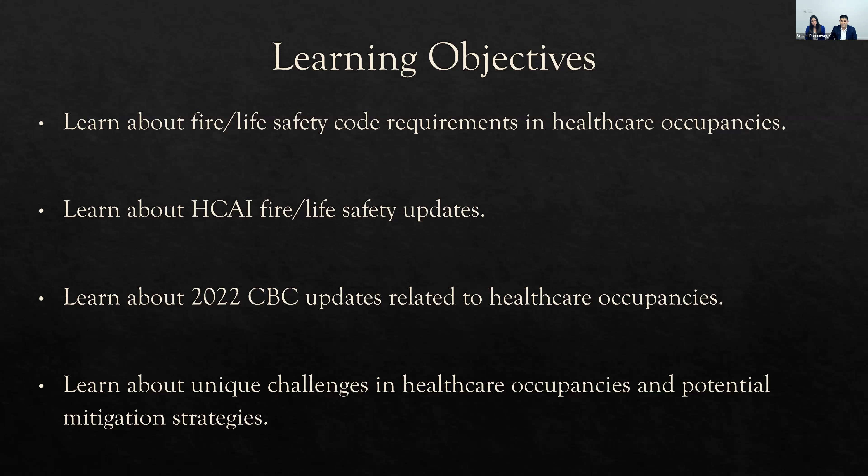Here's our learning objectives, which I think was covered in the advertisement. For the agenda, we'll give a brief overview of the fire life safety concept. Nancy's going to take us through some HCAI updates, and then we'll go over CBC updates related to healthcare facilities. If we have time, we'll cover some key fire life safety issues we commonly see coming up.

So, good to think about from a fire protection life safety perspective: why are hospitals different? The main reason is we have many occupants who are incapable of self-preservation. They might be on life support, they may be undergoing procedures - they effectively cannot evacuate themselves in an emergency condition. So it's a unique safety hazard that the fire protection life safety requirements need to address. If there's a fire event, we can't just have everyone go to the stairs. We need to incorporate features into our buildings that can protect those vulnerable occupants.

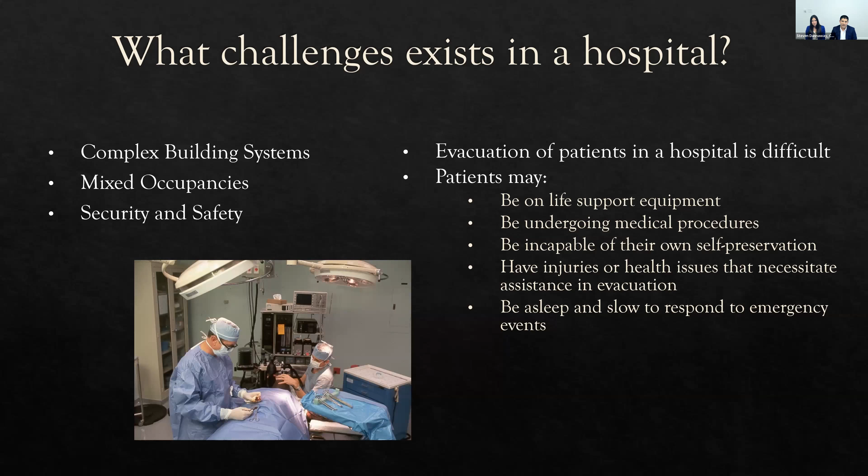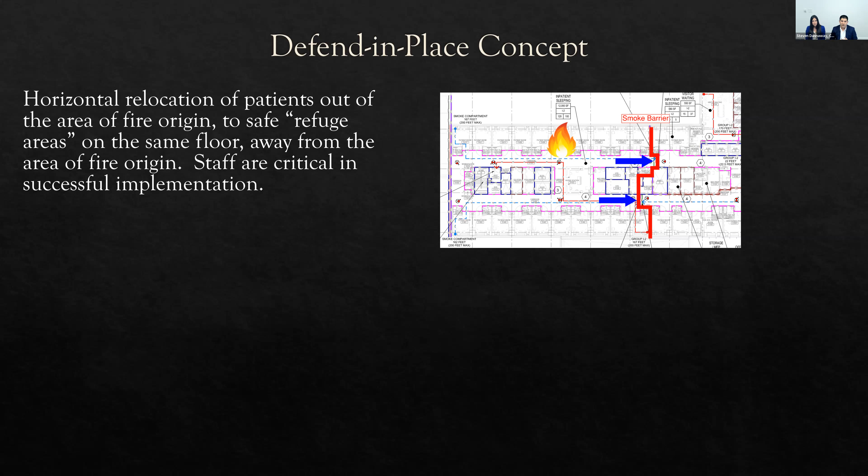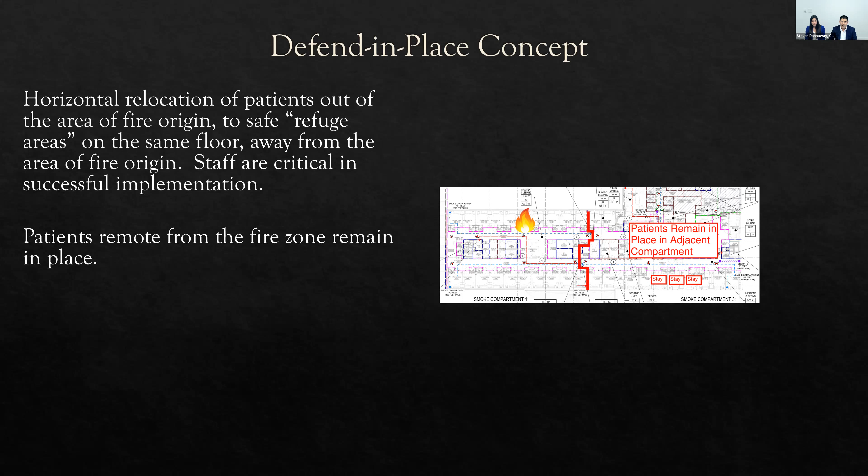I want to cover the defend-in-place concept, which is how we do that. Say there's a fire in one smoke compartment - one area of the patient floor. Staff will be responsible for assisting with the relocation of occupants across smoke barriers into an adjacent compartment. Meanwhile, patients on the other side of the smoke compartment will stay there in defend-in-place mode, which is where that terminology comes from. They won't be evacuating, they'll be finding refuge, waiting as events unfold, and as staff and emergency responders decide the next course of action. Other occupants in the building can still use the stairs, and the stairs are a last resort if evacuation necessitates it, as well as a very important feature for the fire service to access the floors. So that's definitely why we still need stairs in our code - we have to incorporate them into our designs.

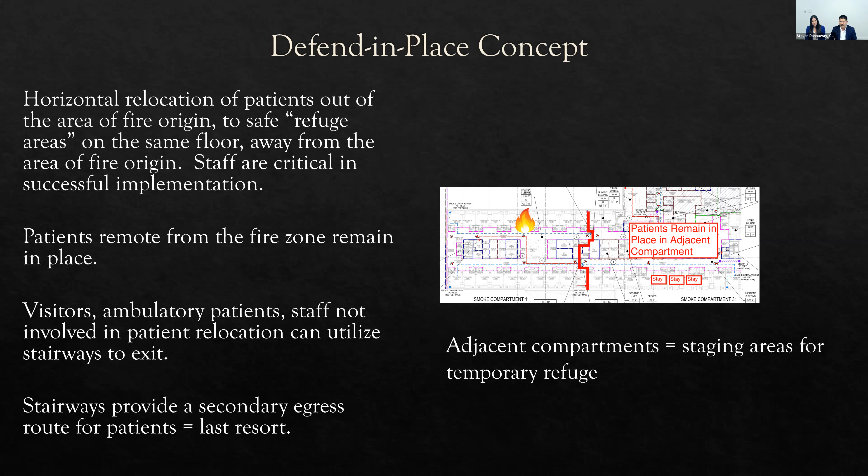Okay, so I'll turn it over to Nancy, and she'll take us through the HCAI updates.

Just a brief update, thank you Steve. Some of this is old news now, but still big changes - all upper management is new.

Paul Coleman retired, and Gordon retired—some of you might be familiar with him from working in the LA office, where he was the deputy division chief. Our director is new as well; I didn't put her name on here, but it's Elizabeth Landsberg.

So literally everyone above supervisors and up are new to their positions, not necessarily new to FDD. Chris Tokas is the new deputy director—I say the new Paul, but people know Paul's name. Arash is the new deputy division chief in LA, and Richard Tannehill is the new deputy division chief in Sacramento.

Project-wise, the numbers are about 19 billion in construction projects right now, give or take. We actually had about 80% of our staff teleworking, but we've since brought them back. Tuesday, Wednesday, Thursday we're back in the office, and then most people work from home Monday and Friday.

We have about 33 vacancies at FDD, so if you're looking, keep us in mind. I'm sure everyone's in the same boat—it's hard to find people right now.

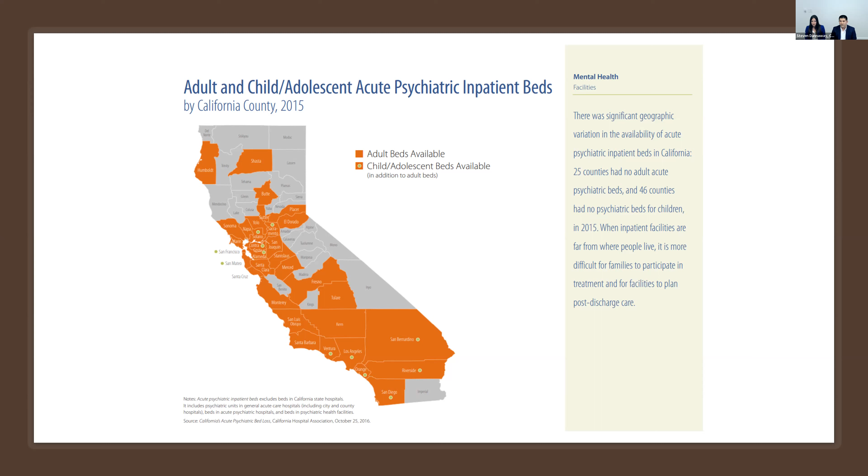Through the years we have changed code a bit to move towards this, and you'll probably see more changes in the near future to keep this momentum. In 2016, our mid-cycle edition, that's where a lot of the changes happened—some of you are familiar with the I2, I3 use. Steve and I were just talking about the confusion that was there, which was mostly fixed in our 2016 code cycle.

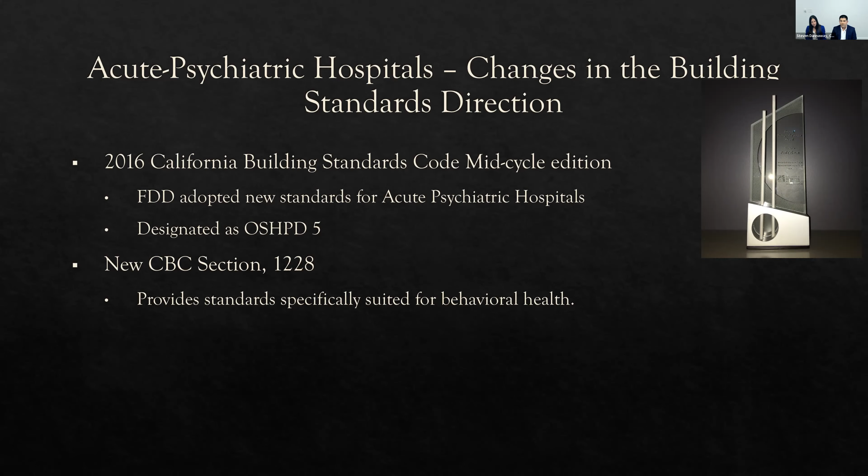There's a lot of changes with how psychiatric facilities are being looked at, California-wise, and structurally the bigger changes have been structural. The structural requirements are now based on model code, with the importance factor being used based on the number of patients instead of the number of stories in a building—that's a big structural change.

The architectural portion has some specifics you might need in a psychiatric unit that you may not in a typical I2 setting, and vice versa, so we're addressing some of those changes. Identifying these as locked I2s as opposed to I3s was helpful in alleviating some of the confusion that was there in the past.

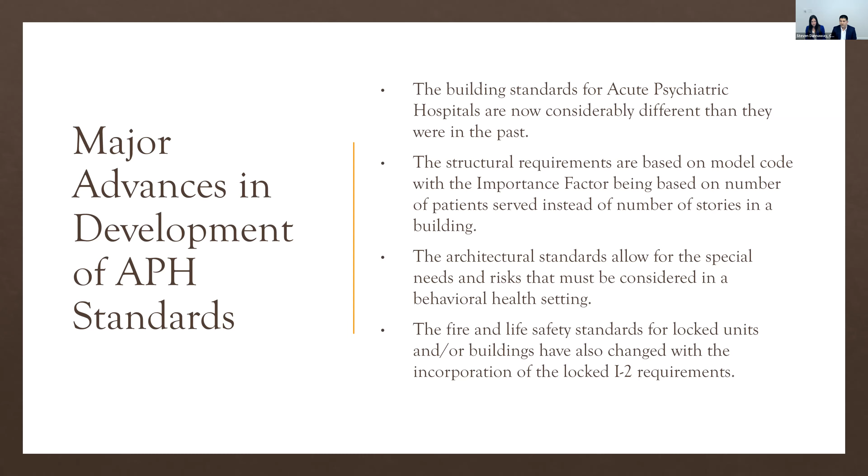There's an advisory guide out that you could find on our site. This doesn't replace code—it's just a guide, as it's titled, to help facilities and designers look at what they might need to get through a project with a psych facility in it, along with some sample AMCs, which are always helpful. We have some other guides on our site too, but that's one big one.

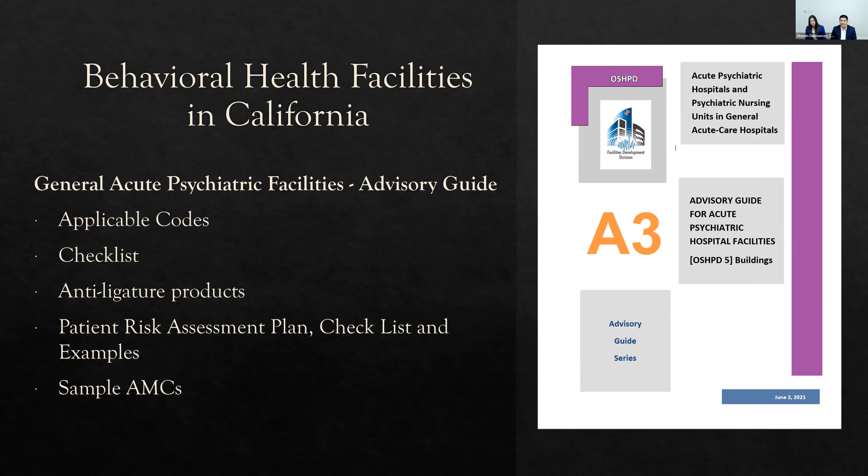Something we've worked on this past year is a template design. An entity came to us wanting, I think, 9 or 11 facilities throughout the state, and wanted to submit it as a template. So you get all the major items through a kind of exaggerated preliminary review with OSHPD—HCAI, OSHPD, we'll use them both—but it was a very, very detailed review, of course.

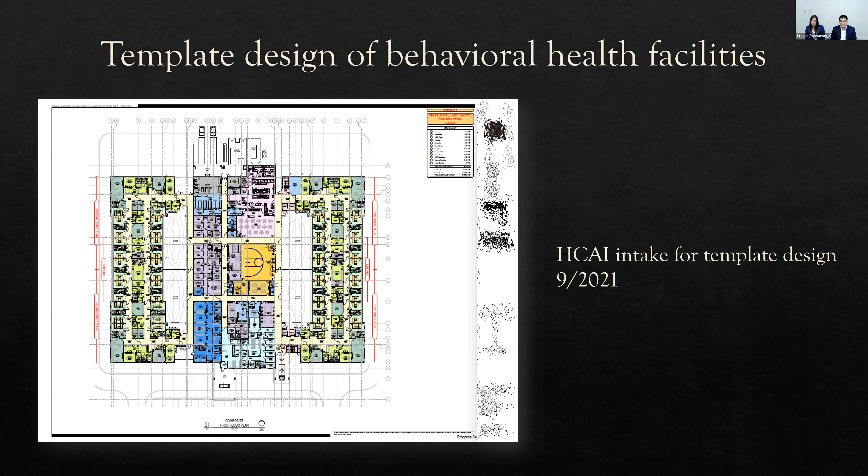We set this template in, and it comes in various forms—there's a 1-story model, a 4-story model, a bit of a different layout—but basically these 3 design concepts had us review that, with the intent to have the next review process go much faster for the number of facilities they want throughout the state.

Interesting designs, and although we match NFPA 101 requirements when we can—that's often our goal when changing code—there are still some differences. When you have entities from different parts of the country, there are California specifics they may not be used to, but we ironed some of these out as part of helping move these facilities to the forefront and get them through the process faster, because they're really desperately needed.

Another thing we've been working on are microgrids. That's something many people are probably hearing a lot more often now. A lot of work has happened on the OSHPD side—I'm just going to stick with OSHPD today.

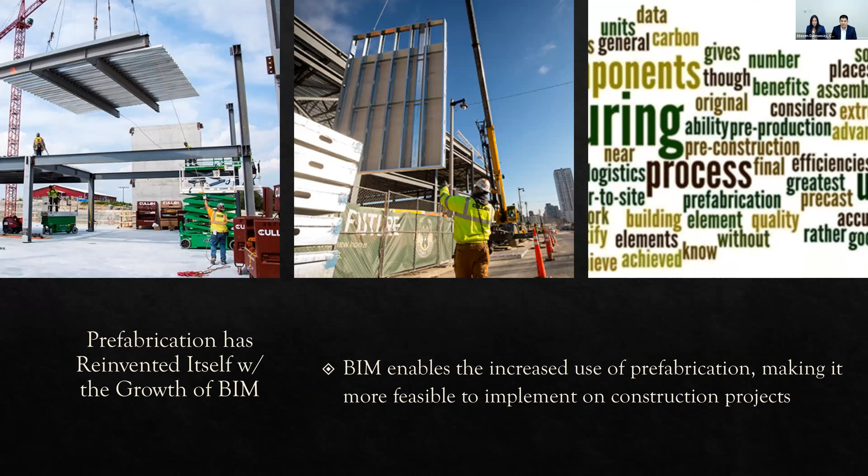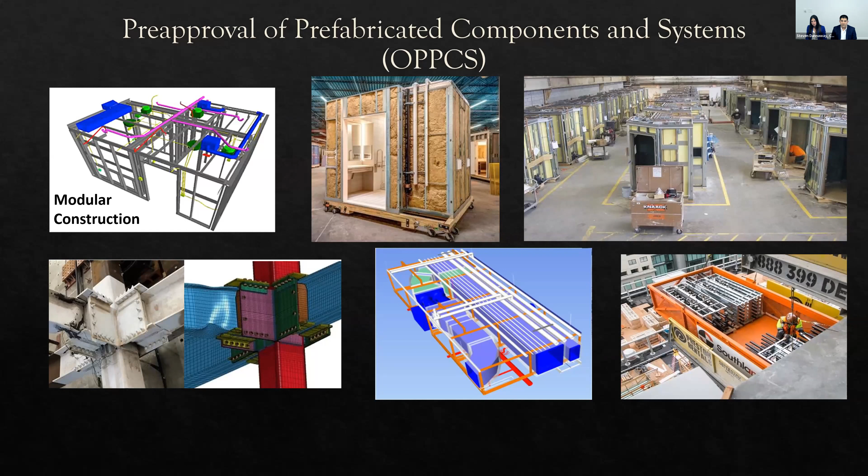But again, for fire life safety, we have to look at something as simple as where is this pre-approved, sorry, prefabricated restroom. Is it along the wall of the corridor, the fire partition? Is it along a fire barrier? How do the sprinklers come into play? Fire alarm? What finishes are being used? So again, fire life safety wise, that's not what the pre-approval is for. It's just structural, and then fire life safety will still look at everything. But regardless, it does help it move through a bit faster to get through the structural side.

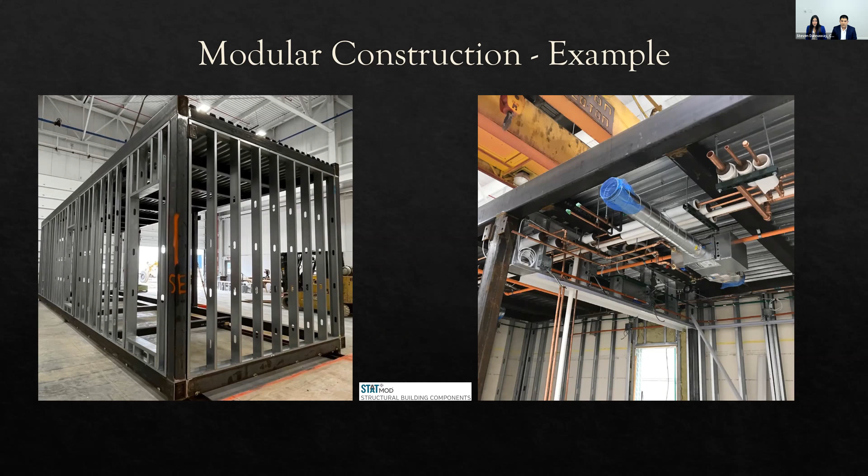And it's not difficult, especially when it's a restroom, fire life safety wise - looking at what you would normally look at with code. So I started seeing these a little bit more. Shouldn't name names, but that's one. And then just a slide that shows some of what you may see if you're looking at the pre-approvals on our site.

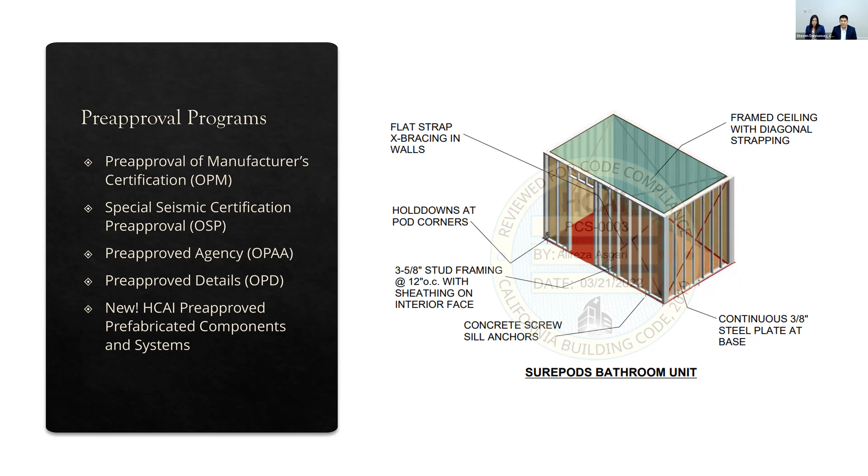This one, I almost hesitate to bring it up, but no, this is a great thing. If you aren't familiar with this, it's kind of a new but not new CAN - it's CAN 1-7-153. It's a CAN for non-material alterations to approved documents. We had a CAN previously, and then it was rescinded because all the information was pretty much in the code and then also in our FGI manual.

But as some of you might be familiar with, this causes a lot of confusion. When a change is made, is it materially altered or is it not? Who determines that? What types of changes fall under which one? This CAN will help guide design professionals through that. But keep in mind as you're reading that, look at the FGI as well, because this is very general. The FGI will get into some of the specifics.

But anyhow, this is a new CAN. We've got trainings on this, I'm sure we'll do more trainings. If you haven't attended, keep an eye out on our site. There's a recording for one of them, but I would assume we'll be doing more of these because a lot of questions come up with this.

It's not difficult, really, once you read through it. It's just putting, again, helping determine if the change is materially altered or non-material altered, and then also putting that ownership back on the design professional, which is where code says it should be, and laying out: here's what was approved, here's what the approved construction document said, here's the change we want to make, here's the difference, here's why we think it's a material alter or non-material alter. And if it's material alter, it's going to need an ACD, but it just helps lay that out and helps it go smoother. Because if you've got it laid out - here's what was approved, here's the change, and here's why we need it - it just makes that whole process a lot faster. This will help guide you through.

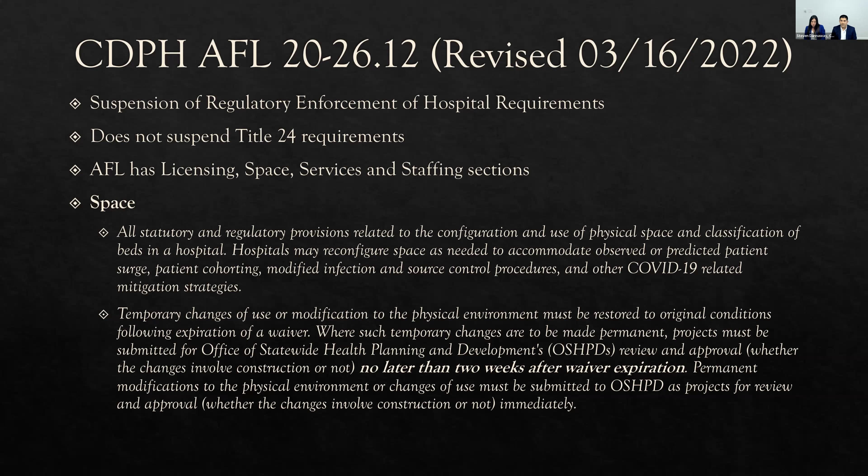Again, this was for the temporary use. I use the example of a business area being switched over for patient care, and they want to put that back to that business area. Good, go put it back to original. If a project is...

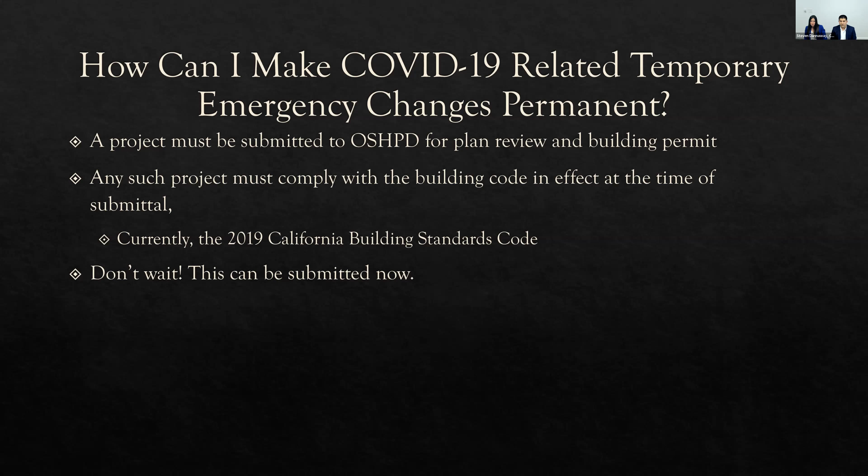Sorry, this is about the pre-existing condition. If they want to make it permanent, like, well, all right, we switched this area over and it works out great, we want to keep it this way, then you've got to submit a project, and that project will have to comply with current code when it's submitted. And we start doing them now. If you know that you want to keep, or if the facility knows that they want to keep the area the way that they switched it over for COVID, but they want to keep it permanently, then get the projects in.

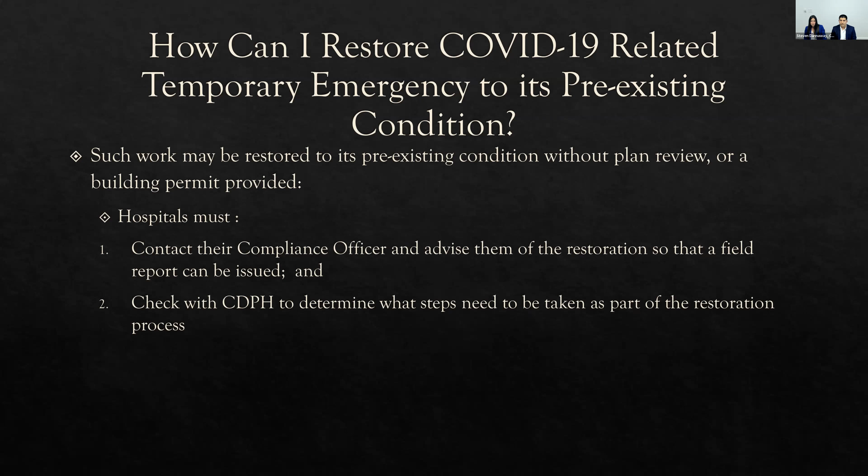Back up a slide here. For the work that is going to be restored back to its original condition, a plan review isn't needed, as long as - when I'm teaching code, I always say provided and/or, those are big words in the code - but you won't need a plan to put it back to its original condition, as long as you've got to contact the compliance officer, advise them of the restoration that's happening, and then a field report will be issued. Also check with CDPH to determine their steps, because we can't speak for them. But typically, to put it back to exactly how it was before COVID, you shouldn't need a plan, but you will need to have communication with the compliance officer.

Okay, great. Well, that was a lot of great information. Thank you, Stephen. So thank you.

You're welcome. So now we're going to jump into the 2022 CBC updates. We're going to focus more on updates for I2 occupancies, and there's a lot of changes, so this is not a full presentation of every single change - just keep that in mind. As a reminder, I believe the first printing of this edition of the code is coming out July 1st, and January 1st of next year, 2023, is when we're going to see this take effect.

Do you want me to talk a little bit about that? Nancy is really involved in the process of change, and she's going to talk a little bit about that, so you might be familiar with how the process works, or maybe not. With our architectural, structural, mechanical, electrical, plumbing changes, that happens through our building standards unit. They make those changes and it goes through the whole process with the Building Standards Commission.

For fire life safety, we work under the umbrella of SFM. So in our fire prevention unit, we do those changes for fire life safety, and it's not just building code, but of course building, fire, mechanical, electrical, plumbing - whatever is related to fire life safety, that would be ours to change. We make those changes, and then I submit our changes through to SFM.

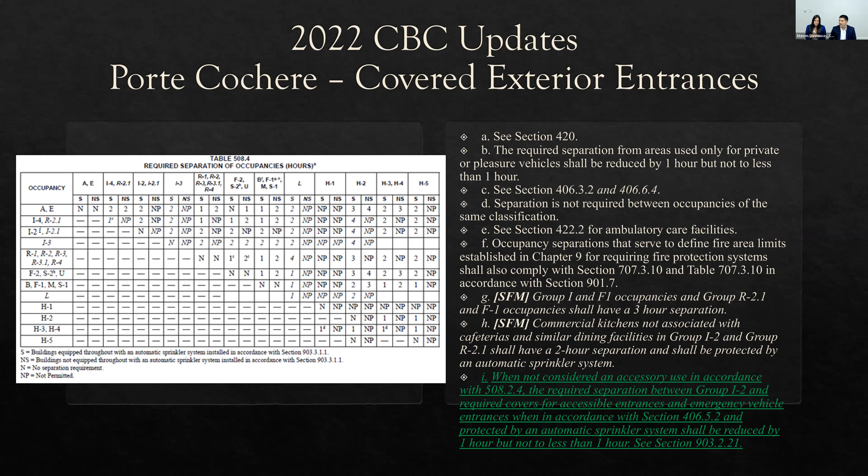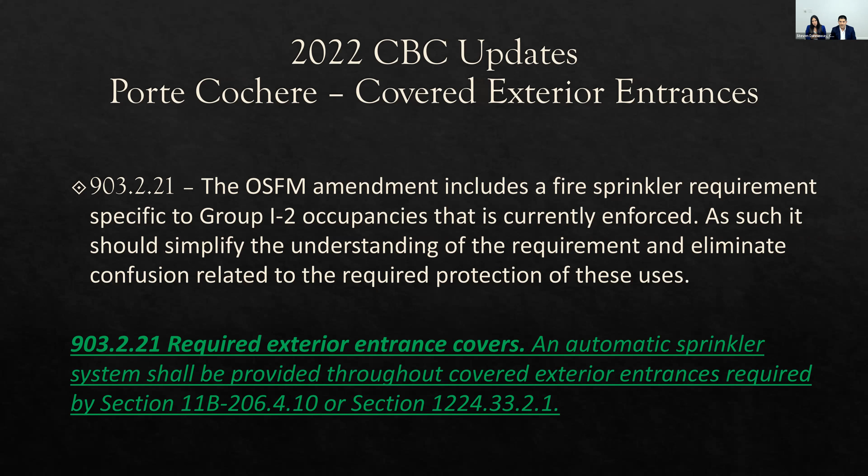And then this is the last requirement, so tying it to requiring an automatic sprinkler system for these porte cocheres. So if you have this on your project, keep in mind: do I need a separation from the building? Type of construction is a big issue that comes up, and do these structures need fireproofing and then sprinkler protection?

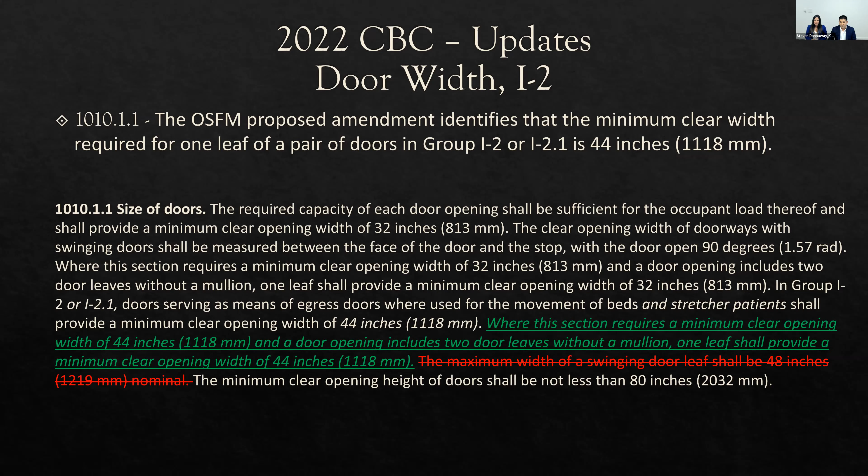Hopefully, right. And remember, measuring there you need the 44, because it's measured between the hardware and the frame. That's not part of this section exactly, but there's another section that addresses it more specifically. I presented this to our staff last week and they said, don't you still need the 44? I said yes, because you still need the 44 between the hardware and the frame. So just keep that in mind. But hopefully this will put this one to rest.

It's not too much past that. I mean, you've explained that. What does your door have to do in a corridor versus a suite? And if it has a leaf, how does that leaf operate? Sometimes we'll find in corridors when both doors are open and you close the main door, the leaf isn't latched, and there's probably more confusion talking about it than not.

But the door has the positive latch, yes. And then what about this leaf? Not necessarily, but it can't prevent the other one from latching. There are other provisions in 1010 talking about how it latches. So this was put in here just to show that yes, you can have a manually operated latch for when it's edge or surface mounted.

So when it's on either the face of the door or on the side of the leaf, excuse me, not the door, you can have that manual on that leaf as long as that leaf isn't needed for the 44 clear, which it shouldn't be anymore because we made the other change in the code.

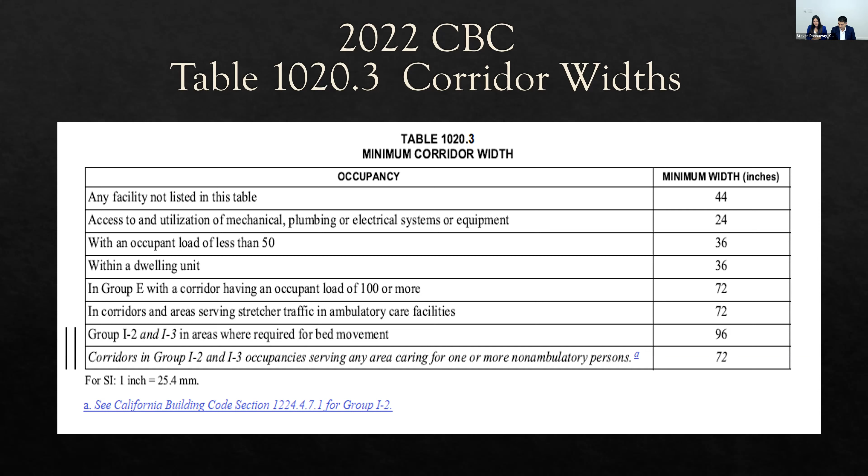So dead end corridors, I think we wanted to just caution the audience. There's a code change that allows 30-foot dead ends in I2 occupancies, but that red text is in the IBC and in the CBC, so the corridor can't serve any patient rooms or patient treatment spaces. So we can't just go to 30-foot dead ends for any corridors, and maybe most corridors are still 20 feet. California also made a change to clarify that the 30-foot increase would only apply in fully sprinklered buildings. That 30 feet does align with the life safety code, so it's interesting that the IBC made this change. Just be aware of that. Sticking with 20 feet is a good starting point, and we'll go from there.

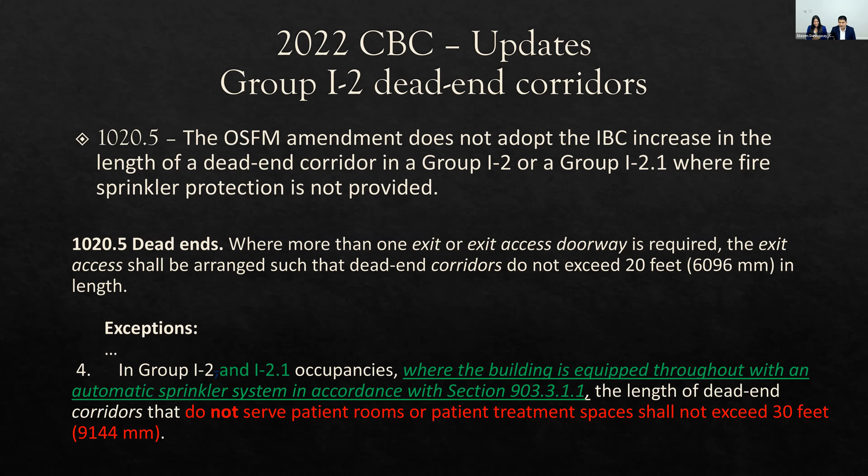So sprinklers and elevators, this has been something that's come up a lot over the last few code cycles, and effectively there's been a shift in the industry, probably dating 10 years now, to get rid of sprinklers in elevator hoistways, machine rooms, and other elevator spaces. Various reasons - one is the impact on the fire service's ability to use elevators. The other is just safety of construction workers and people who maintain the elevators having to get into the shafts, which has resulted in a handful of accidents or events.

And remember, when you're looking at the elevators, freight elevators still need the sprinklers. So a few things to keep in mind with the sprinklers and the hoistways and these different areas are: do you need shunt trip? You might not be able to remove it. How is recall happening? There's a lot that goes with this.

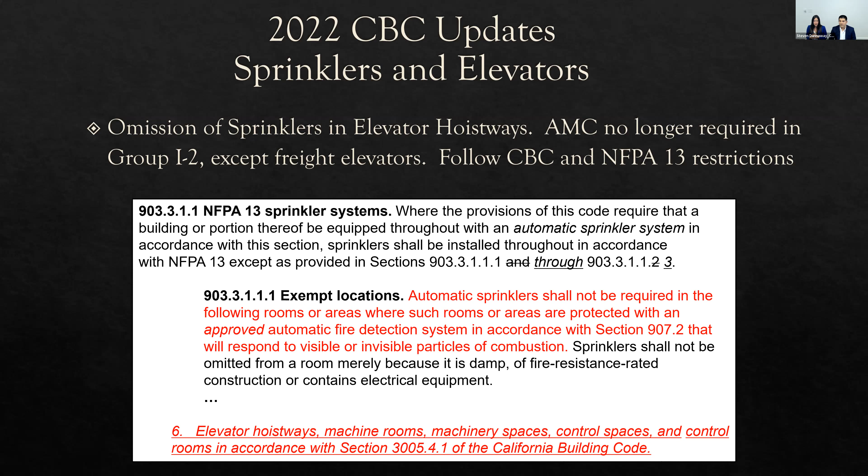But anyhow, keep in mind that yes, we do adopt this and we do make these changes so it matches model code, but you may still need smoke detection or sprinklers even, depending on the type of elevator you have, and then what's happening with shunt trip and recall and requirements that CFC has, high rises, etc. Yeah, elevators and fire alarms and fire protection can be complicated.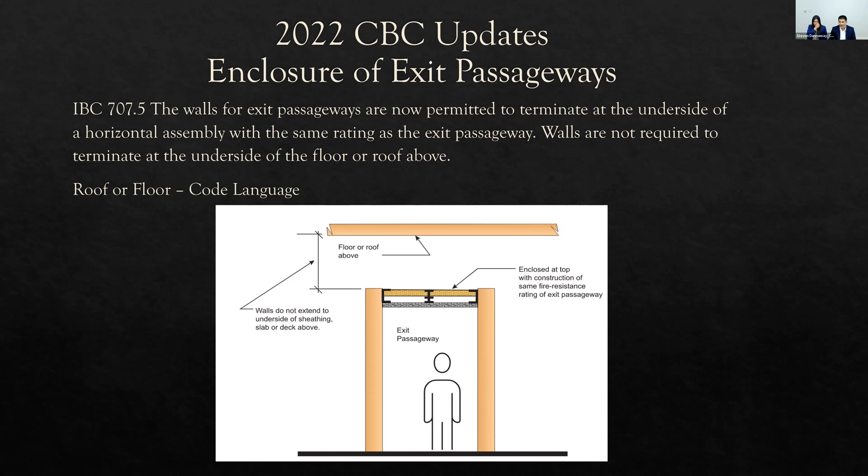So we'll see how that gets enforced by code officials, but this comes up a lot, especially in existing buildings where you're tacking on an addition and you have a stairway that used to discharge to the outside, and how do you get those people out? I know it's something we've all dealt with, so we'll see how this develops. It should be, and it was in old code - we might remember that it was in old code, then went away.

Then we would do AMCs, like Steve said, for the existing facilities. So now it's coming back again. So that'll make a lot of lives easier.

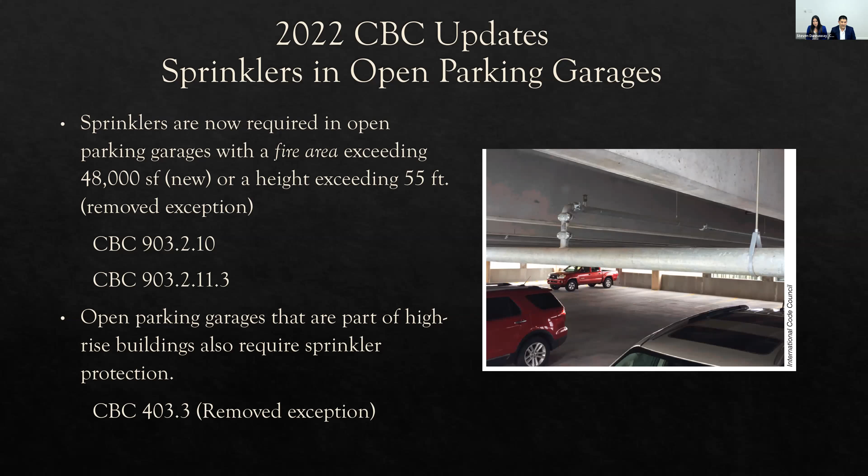Yeah, and I know we're talking about healthcare facilities, but we have a lot of parking garages at these big facilities. So this is a change that's going in where larger parking structures are going to need to be sprinklered, even if they're open parking garages. This change stems from just changes in car materials - they don't make the cars of the same things they've done over the years. Some are electric with lithium-ion batteries, and there's a lot more plastics involved. There's been some high-profile big fires in Europe that burned up the whole open garage, so this is just something we'll have to account for in new open parking garages.

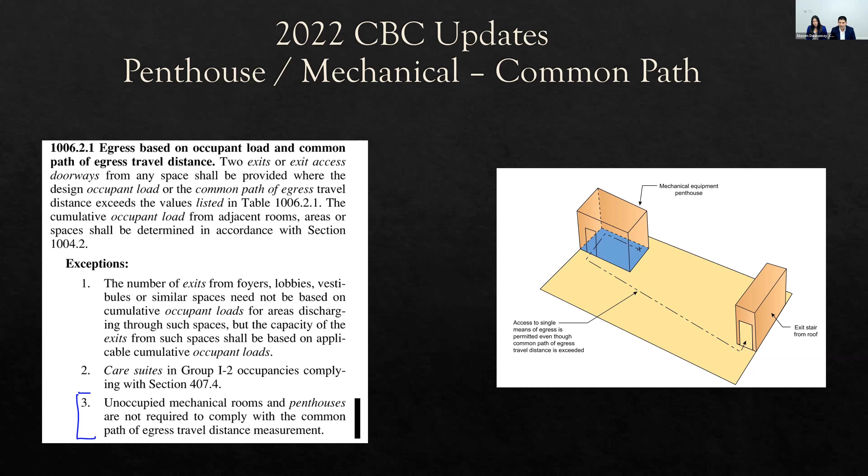This change has to do with unoccupied mechanical rooms. We see these often in maybe full floors, and the change is you don't need to meet the common path of travel in those spaces. You still need to meet overall travel distance, but common path, where you have to make a choice in two directions, two exits, that doesn't apply for unoccupied mechanical rooms and penthouses.

Okay, now we have some time left, so we'll breeze through these. These are key fire life safety issues that we're going to cover, and hopefully prevent your facility from looking like this.

So there are a lot of slides here, but it's basically just copy and paste from the code. What we wanted to bring out is security versus egress.

You essentially have three ways, well really it comes down to two because the third option nobody picks, but three ways of securing. 1010.1.9.7, a controlled egress door, that's where your locked I2 provisions come into play. This is only for the psychiatric or mental health areas, not for labor and delivery, we don't lock babies, moms and dads, people visiting them, or peds. We don't lock those.

Some people might be familiar with the 2016 edition, where there was an exception to 1010.1.9, I think it was 6 at the time, exception 2, that did talk about babies and labor and delivery. That was struck in mid-cycle 2016 to take that out.

But anyhow, so locked doors, where you'd expect to see them in a psych, section 1010.1.9.7 controlled egress doors are what we call your lock doors. That's not code terminology, but that's what you're going to see in your psychs.

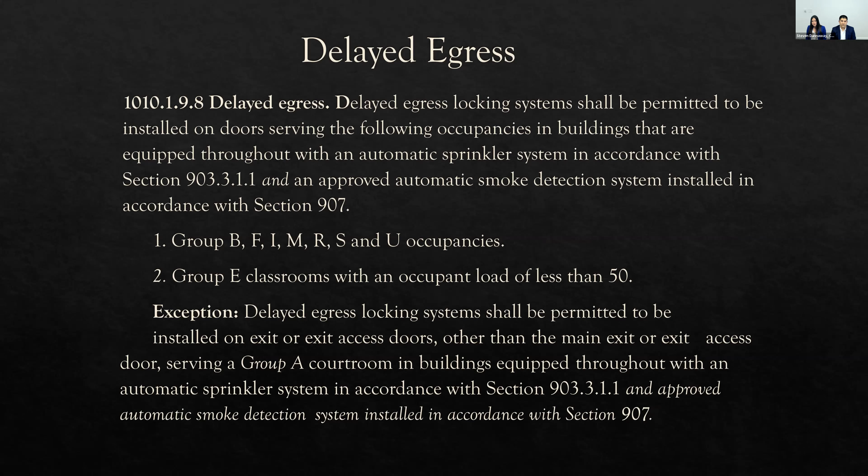Similarly, I think there are 11 now, maybe more - it used to be 6 or 7 criteria - but now if you're going to have delayed egress for security, there are various criteria that have to be in place in order to have that delayed egress.

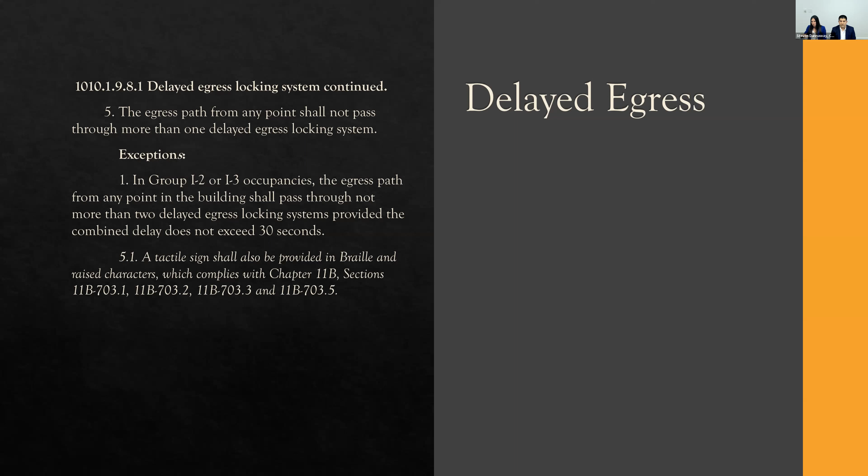Please put these on the plans, and we know they'll be on different pages - some information on architectural, some on electrical - but show this on the plan. Where's the release for the doors when you have delayed egress? Where's that release located? Because what happens is we get into construction observation at the end trying to get occupancy, and we can't find the release, or it's somewhere down the hall and not at the nurse's station.

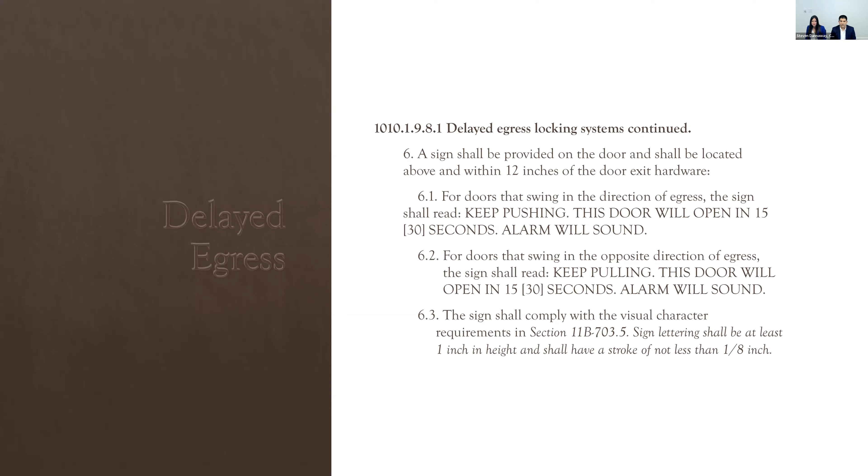So make sure all of these requirements, all the criteria that have to be in play in order to have delayed egress, are shown on the plans. Some of it's going to look like just a list, but when it's something to be shown, show it please. That helps in the long run. There are 11 criteria that have to be in place if you're going to use delayed egress.

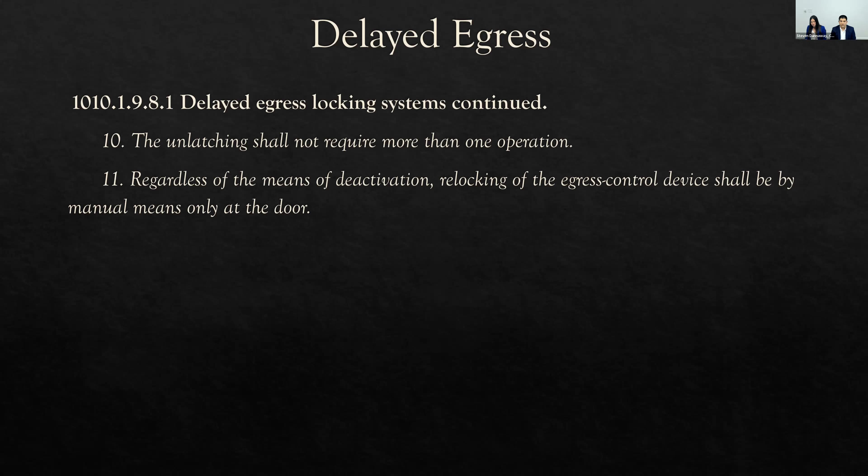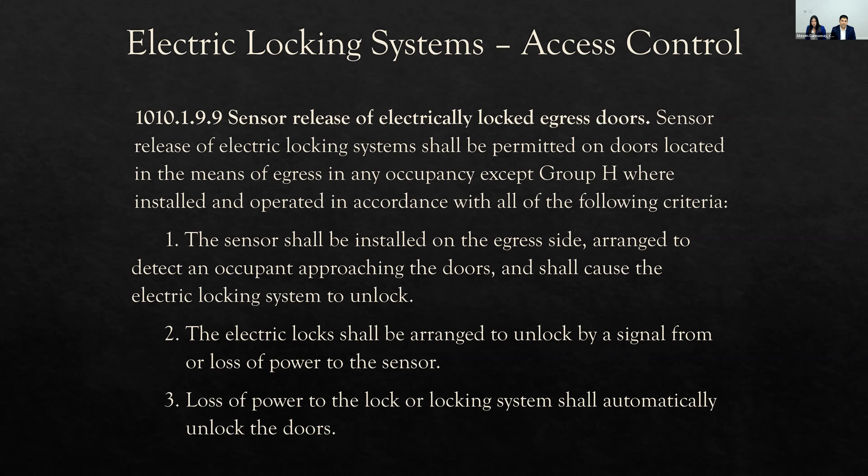So you've got your controlled egress, your locked psych, delayed egress, and then you have sensor release, electrically locked egress doors. This one we don't see too often because one of the criteria that have to be met is having a release 40 to 48 inches from the door.

So you'll probably see these similar to this at work - when you come into your office, you might have to badge to get in, but you can freely get out because there's a sensor on that door that releases it when that panic hardware is activated. But one of the criteria for this type, when it's locked from the egress side, is to have the release there. So this usually isn't an option our facilities pick, because if you're trying to prevent someone from going somewhere and all they have to do is turn to the side and push the button, it's not really useful.

But people get confused with these. Some of it can be because of the old terminology and old code, what they used to call these sections.

They've changed the codes now so it's clearer that it's talking about when it's locked from the egress side. Your main three types are the lock, the controlled egress, the delayed egress - basically free egress as long as all criteria is met - and the sensor release. Those are the 3 types to look at.

We do all day classes on doors and security, so that wasn't a huge lesson, just pointing out you've got 3 different ones to choose from. But controlled egress can only be chosen if you're looking at psych, Alzheimer's, or dementia units - not peds, not mother baby, not NICU. You can't use that for those. That's basically left with delayed egress.

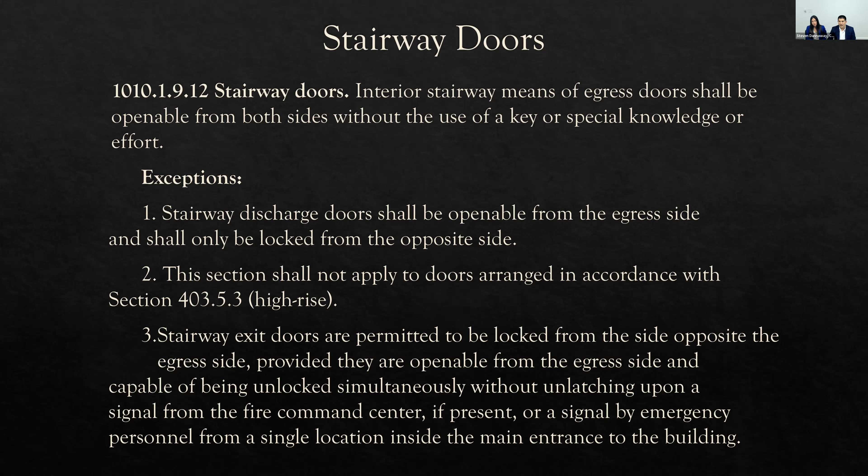Stairway doors - typically this looks like a discharge door, and typically those are unlocked going into the stair, but the code does allow you to lock them from the interior. There are provisions for that, and it's something we need to observe. I wanted to show 2 examples because this comes up in most projects where we have a conflict with security and egress. These are 2 examples where it's been done in a compliant way.

There's a code requirement where all portions of the floor need access to at least 2 exits that are normally unobstructed, meaning through unlocked doors, or delayed egress is an option. In this example, if there's only 1 stair on the left side of the plan, people in that public zone, to the left of the red circles, would only have access to 1 exit stair, since all their other exits would be through the patient unit, which is a locked door.

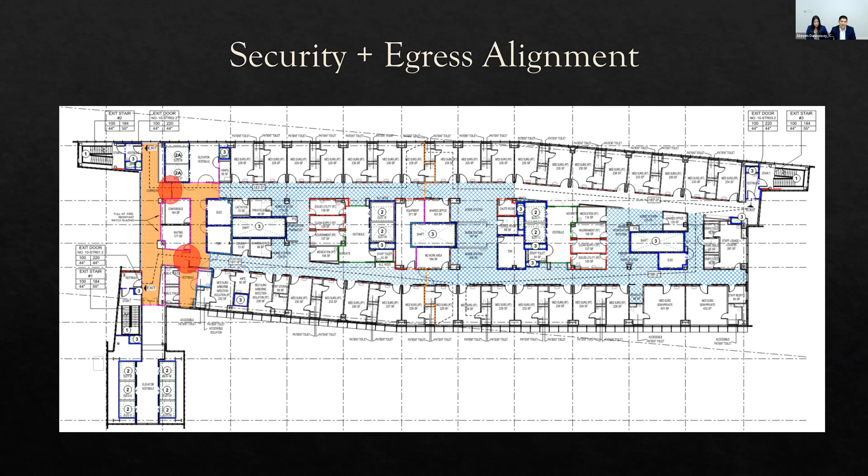I should back up - those red circles represent the control doors to the unit. So you see there are 2 exits on the public side, so the public occupants have access to 2 exits. This other example shows those red doors as control doors to the patient units on the left and right, so the center spine going north-south is a public zone. If I'm in there, I still have access to 2 exits and I don't have to go through the units.

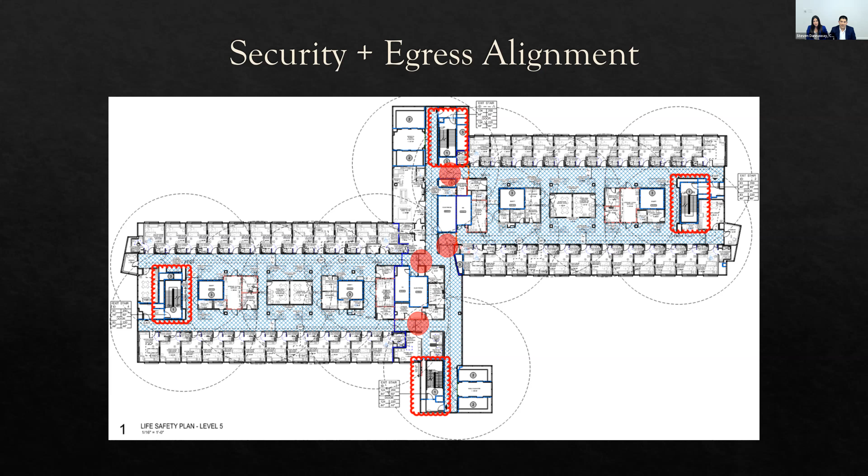So just keep that in mind when you're laying out - it's important to think about where the locked doors are, and sometimes that comes up later in the design. I was really fortunate on a recent project where we had the security consultant and us really pushing that, and we got a stair moved where it would have been an issue in the CD phase later. So just keep this in mind, making sure we have our multiple exits, or at least two exits.

Corridors - we just threw this in here as a reminder. Stephen had great pictures to add here. That's what they do look like when we leave, right? But that's not what they should look like.

Title 19 doesn't allow for storage in the corridors, regardless of the width of the corridors. You've got a 15-foot corridor and you think you could use part of it for storage because you've got way more than 8 feet - that's not the case. Title 19 is pretty clear that there's no storage in the corridors, and the corridors are to remain clear regardless of the width.

Code does allow certain areas to be open to the corridor, and waiting areas are one area with certain provisions. You'll see each of these in 407, and similarly to the doors, each will have a certain number of criteria, around 5 or 6, that have to be met in order to be open to the corridor. So waiting areas, nurses stations, those areas can be open to the corridor. We have a nurses station example to indicate what can be in that nurses station. The code is clear about if a waiting area is open, what has to be in place regarding sprinklers, smoke detection, and how the corridor construction is continued.

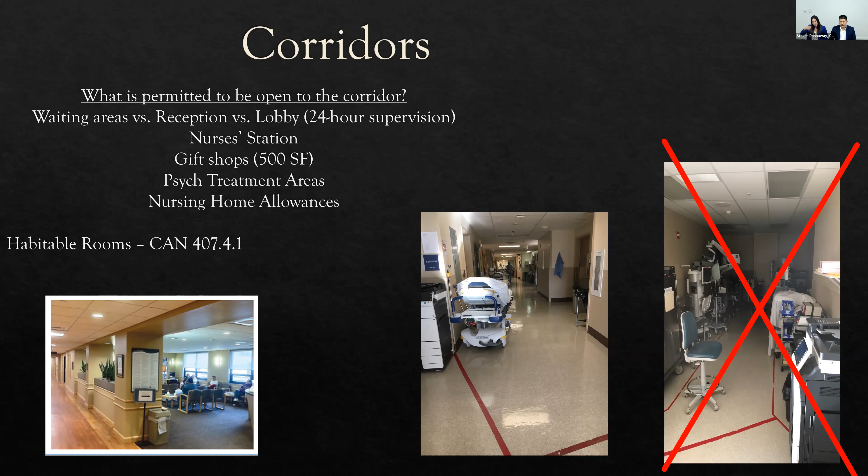Generally speaking, as far as material that can be there: a desk, one or two workspaces with a chair, a computer for each person, a tabletop printer, a cabinet for jackets, purses, belongings, but not a big huge printer, a whole bunch of chairs, or storage for files—that's not allowed in a reception area. But again, just watch that you're designing according to what it actually is and what's allowed to be there.

Indeed, these are fun. This causes PTSD—I'm just kidding. But AGVs, we have a pin for this, it's pin 69.

These carts are just part of new technology. It's something that we work with our facilities on to be able to allow these in the facilities, but criteria have to be met to have these. Like this, for example—does this look like it meets the requirements of Title 19 with no storage in the corridor regardless of the width? No, not at all. Even if the tape's there, you don't have tape that magically becomes a wall rated assembly.

So the pin helps design professionals look at what issues need to be considered when putting these automated guided vehicle systems in a facility. You've got these carts, these autonomous carts, going up and down the corridors with various items. Some deliver lunch carts, some have soiled utilities, some have trash, and some are just the little doctors on wheels.

So there's all kinds of different AGVs, and some things to consider are: are they crossing smoke barrier doors? How are those smoke barrier doors going to close if this is right in the path of that? Should they cross those, or should they turn around and stay in their smoke compartment? One thing we recommend is a room in every smoke compartment that these traverse, that it can go to in the event of a fire, so it doesn't have to cross smoke barrier doors. The fire alarm goes off, it's programmed to turn around and go to its room, and if it has a room, it'll have smoke detection and of course sprinklers.

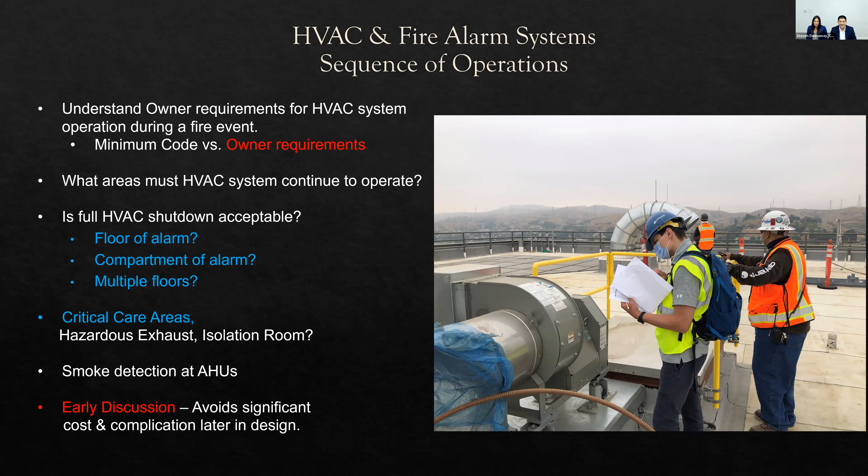And sometimes the owners don't know what they want until you explain it to them, and they say, oh yeah, that'd be nice. And if that happens in CD, it's very challenging.

So this is just an example where it's a nice simple layout where the mechanical engineer laid out the shafts and ducts to really be per smoke compartment. And this allows, if you wanted to isolate smoke level 10 compartment A on the left, you would close the dampers in that shaft. And so you'd isolate that compartment, but really the rest of the building could keep functioning.

And that gets really challenging if you have, say, shaft A on the far left. If that comes down, the duct comes down and then it goes to shaft or compartment B and C downstream. So this shows an example.

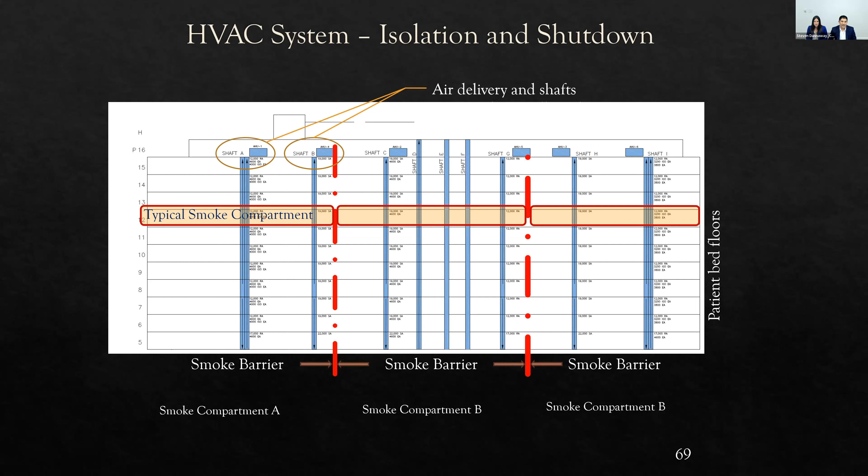So that same image from before. You can see the blue is the compartments, or where the patient units are. Generally the HVAC systems are aligned with the compartment boundaries, so you're able to achieve a design approach where compartment 1 on the left, if that has a fire, you can shut down the HVAC, isolate that compartment, and keep serving the other compartments on the floor and on the other stories.

And this aligns with the defend-in-place concept, where the facilities know they're going to still be having patients being served, and they don't want to just shut down air throughout the hospital.

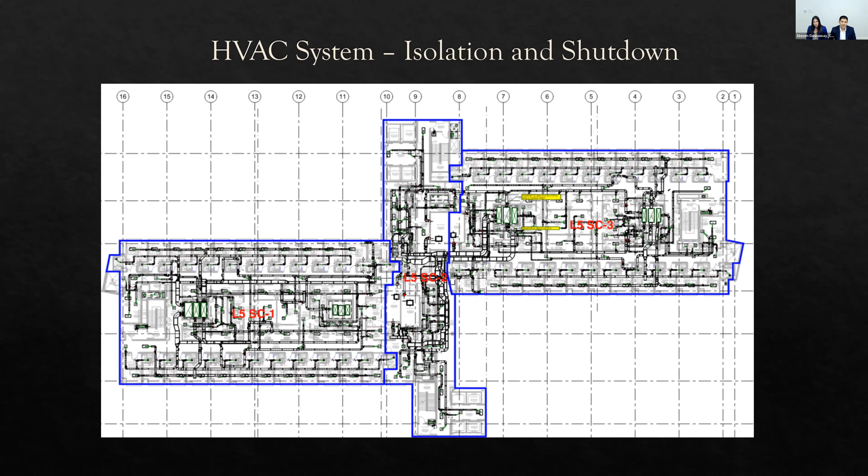And so this, engineering judgments, it's a bittersweet topic for me. Yeah. So there's a lot of fire-rated construction in hospitals, and it's not just the wall construction. We're dealing with penetrations of piping, utility. We're dealing with joints, like where a wall hits another wall or a floor or the curtain wall, and all those have different requirements in the code on how we protect those.

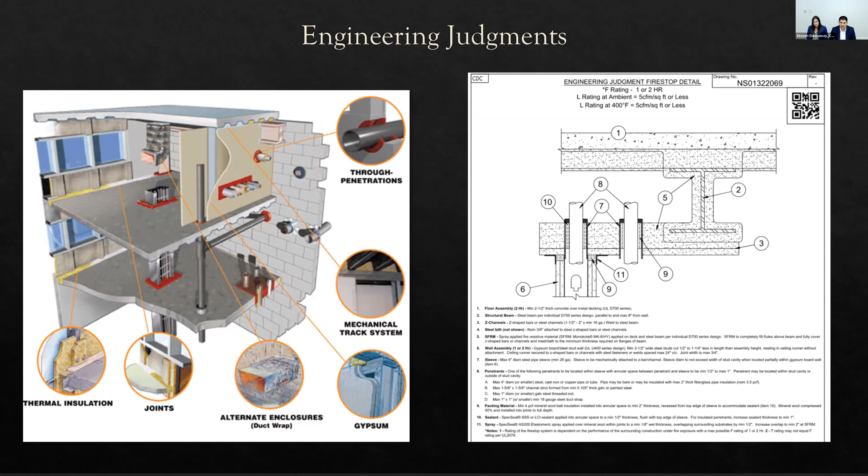EJs can come up before the field or in the field, and then during plan review they have to be on the plans, and an AMC may be required. The differentiator there is whether it's a building element, which is in CBC chapter 6, like a column, beam, or floor assembly, or is it one of those other items like a joint, penetration, or duct. If it's in that second category, then you would need an AMC.

That's something definitely to talk to the FLSO about and how they want to approach that, because we have projects where there's 50 or 60 EJs trying to get submitted during plan review. That's a lot of material both for the design professional to go through, but also for the office to go through. So it's something that needs to be talked about to figure out a strategy.

The benefit of doing it during plan review is when you get to the field, you already have this EJ, and usually that condition is there, so you don't have to stop for two weeks to get an EJ at that time. Anything you want to add?

Sure, I'll try to make it short because we're doing a whole other training on EJs, but that's another one you might see on the HBSB list of trainings. As Stephen mentioned, when it's for a building element, you're looking at 703.3, and there are six items in there.

For your systems, your fire resistive rated assemblies have to meet the requirements of ASTM E119 or UL 263. If they're not listed approved assemblies, here are six ways you could look at it. If you look at number 4, we're talking about EJs for a building element, and if you do an EJ that you don't have a listed approved assembly for, but what you're proposing is based off ASTM E119 or UL 263, then you wouldn't need an AMC, because item number 4 in 703.3 allows you to do that.

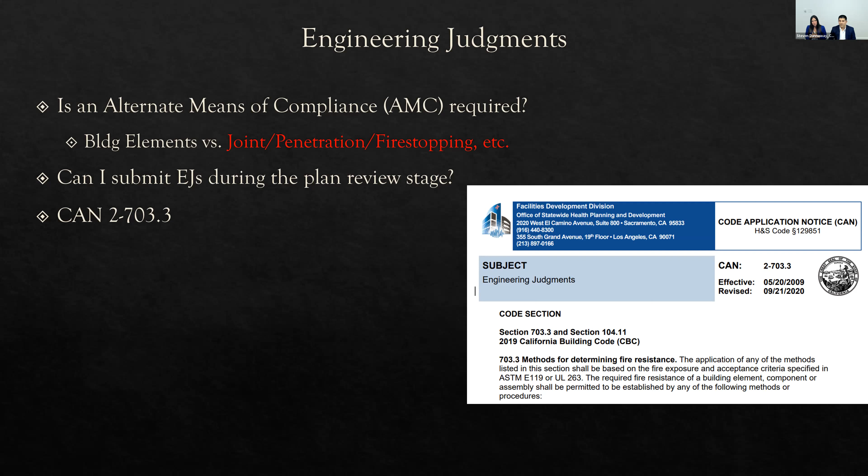Construction-wise, I think firms like Hilti have a BIM service now, and if it's worth it for that project, they'll get involved and model the EJ. They'll get really in the weeds. So that is an option along with the approved directories.

The last topic we want to highlight is just med gases, where there's often some confusion on the actual requirements, because there's NFPA 99 and the CFC, and they have different requirements. There's also NFPA 55. So it really depends what type of gas we're looking at.

I did want to highlight that usually there's a med gas manifold room, and if that one has nitrous oxide, that's an oxidizer, and you're limited to 504 cubic feet before you trigger a special requirement in the CFC for compressed gases. So usually that results in a 1 hour rated room and specific ventilation requirements. And if you're in an interior room, the ducts have to be fire wrapped or in a shaft enclosure.

So a lot of times that room's at the bottom of the hospital. The allowances, if you have CO2 or nitrogen, are higher. It's the nitrous oxide or oxygen that are oxidizers, and they have a lower threshold.

And then as we go up in the building, the cylinder limits, or the oxygen cylinder storage limits, get more restrictive as you go higher. Really we're just following the California Fire Code maximum allowable quantities.